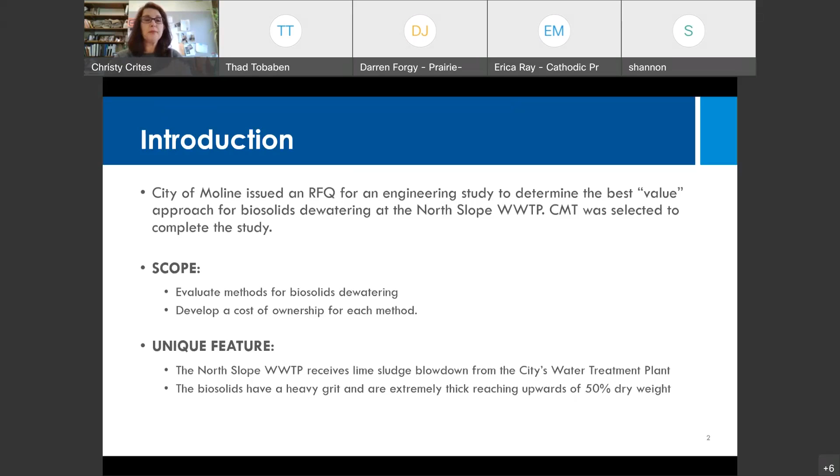The North Slope plant at Moline has a plant capacity of 15 million gallons a day. The original plant was built in 1966 and has had numerous upgrades since then. It's a conventional activated sludge plant. As far as biosolids, what's shown here is a belt filter press and then a belt conveyor that takes the biosolids out.

I forget because I've been doing this for over 25 years, but basically biosolids are the solid product from the wastewater treatment process. Everything that settles out in the primary clarifiers and secondary clarifiers is all taken together, and then it's treated, and ultimately you can either land apply it or handle it wet or dry. Handling it dry gets rid of a lot of the water, so a lot of places prefer to dewater their solids before they either land apply or landfill them.

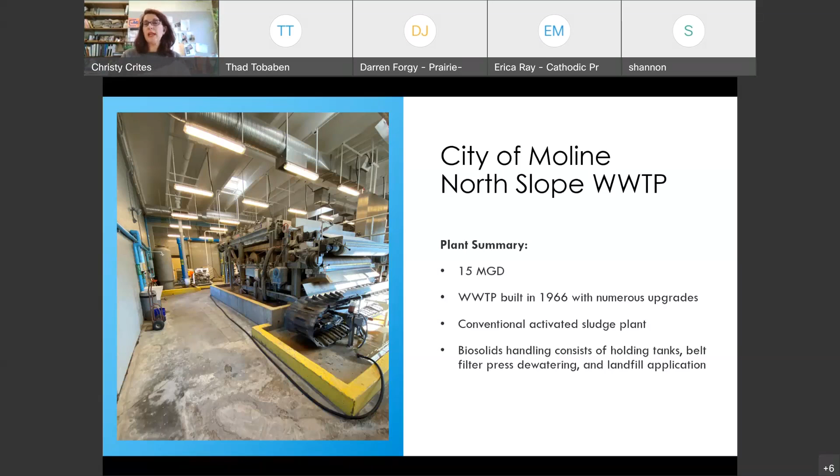So their current operation, this is a picture of a belt filter press, and basically how it operates is it's got a perforated belt. The biosolids, which are probably 8 to 10% solids when they go across it, the water drains down into the sump that you see, and then the dry biosolids come off the top and fall onto the belt conveyor in front of you in this picture, and that goes on out.

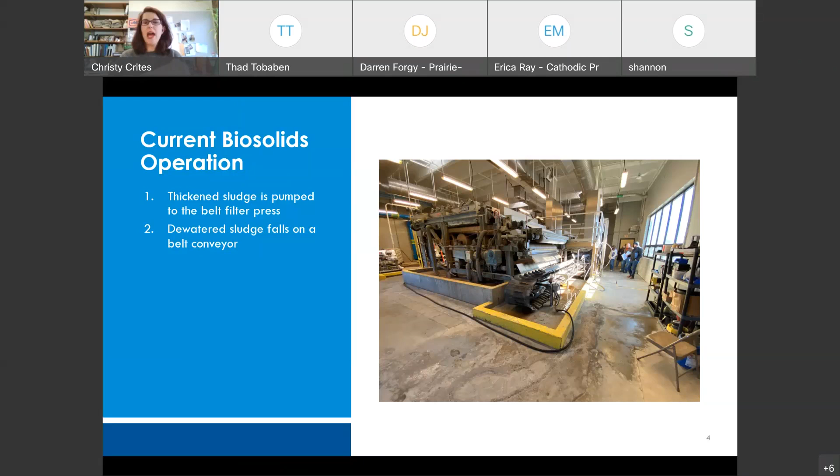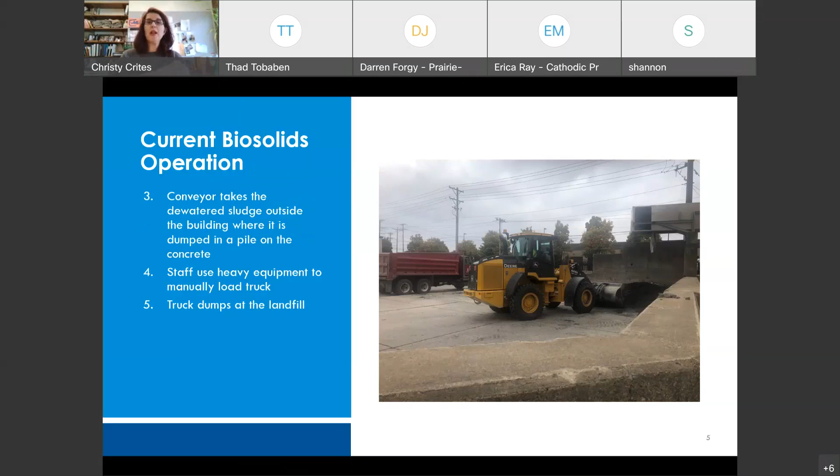Where it ends up is it's dumped outside into a pile, and then the plant staff running heavy equipment actually manually loads the trucks, and these biosolids are taken to the landfill. So it's a fairly labor-intensive process, and we'll get more detail as we go.

The current process, for any of you out there in the wastewater field who have dealt with belt filter presses, you're not going to be surprised at these likes and dislikes. The thing they like about them is they process a very large volume of solids in a short period of time. It does a good job of dewatering the biosolids, getting it down to typically around 22 to 26% solid on a typical municipal sludge, and they only have to run it twice a week.

The dislikes: the filter press requires a lot of attention, somebody has to be there keeping an eye on it to make sure all's going well. The startup and shutdown are time consuming. The conveyor is pretty messy, as the stuff falls off, since it's not enclosed, biosolids can fall onto the floor. Belt wear is an issue because of the lime grit, and having to replace that every so often becomes a costly venture. The dry handling is labor intensive, having to move it independently with the end loader and putting it into the trucks.

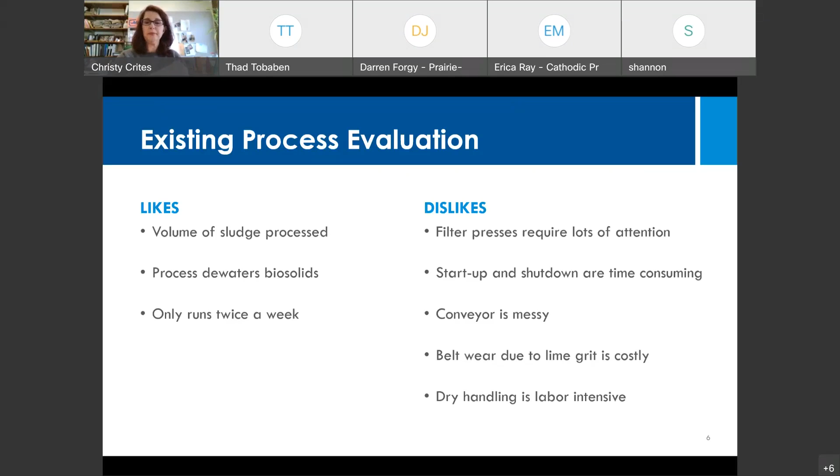So once we got the project, it was time to sit down and do a kickoff meeting. Something that CMT and myself find very important is we like to define the owner's expectations. Just because we know this and do something, we don't know what is their driving force for their decision making, so we sat down and talked.

First, they would like to, if at all possible, reduce the labor to dewater and haul the biosolids. As discussed previously, the belt filter press is very time consuming. So is there a way to automate the process of dewatering the biosolids? Is there a way to eliminate that manual handling of the dry sludge? And is there a way to reduce the labor at the starting and stopping processes? Basically cutting down on the overhead costs of getting the biosolids dewatered.

Next, everybody likes a process that's easy to operate and also can be maintained pretty easily, many times by in-house staff. So can the process run unattended? Is the general maintenance on this piece of equipment minor, or does it have to have a specialty person come in to do the maintenance?

Does the process have redundancy? What happens if you have a unit of equipment that's out of operation or something that fails? And last but not least, annual maintenance - can those kinds of things be handled in-house, or do you have to call in a specialty?

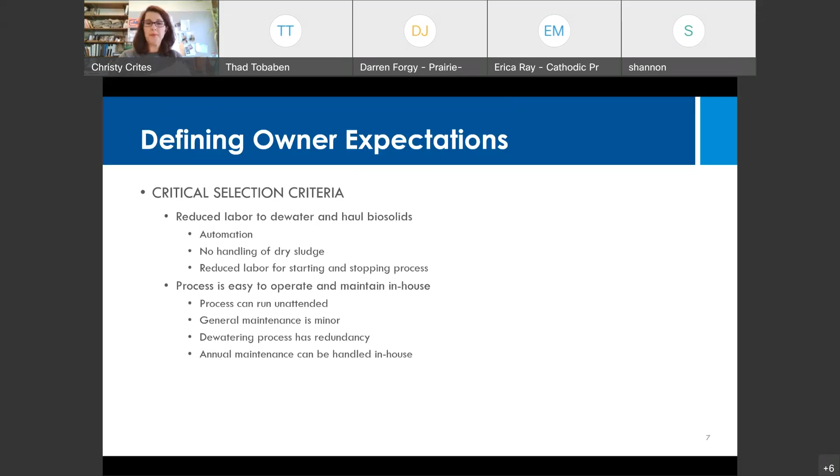More of the critical criteria for the city. Now this one's an interesting one because it's the calendar.

In the past, they had already looked at rebuilding the belt filter presses, but it hadn't moved forward. Then there was a change in the operator at the plant, and the new operator thought, maybe we want to look at something different. Do we really want to go back with the same technology and have the same problems? So it was, can this existing equipment be rehabilitated? And second, by doing the study and then going to a design, is there going to be time to get this process done before the existing equipment actually fails? The belt on the conveyor has been slipping, and when it slips and expands, it can come off the tracks. All of these things are very time consuming and a mess to clean up.

We also wanted to look at chemical costs, because really what you want to get at is the total life cycle cost to run the equipment. That includes polymer addition, the energy it takes to run the process, and the labor it takes for operation and maintenance. And then mine and Maddie's most fun one is constructability.

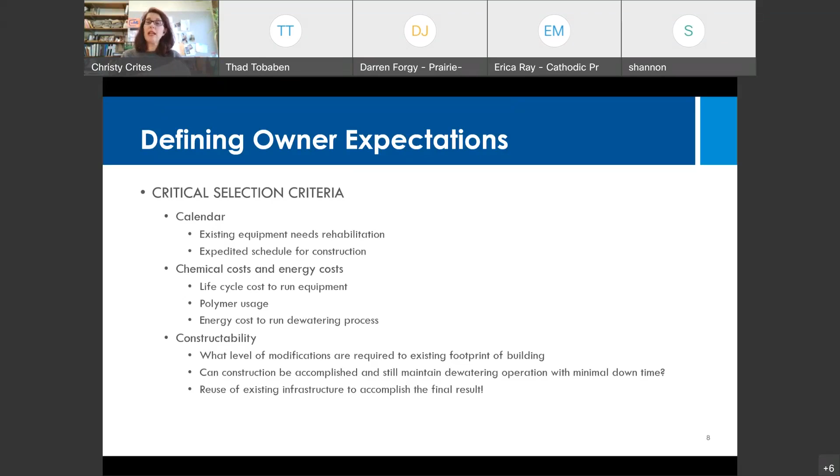What level of modifications are required within the existing footprint? Because they have a dewatering process, can we go back in and either rebuild what we have or put in something different within that same footprint, without having to allow demolition? Can the construction be accomplished and still maintain operation with minimal downtime? And last, how much of that existing infrastructure can we actually reuse to accomplish our final result? Because reusing any infrastructure is obviously going to be a cost savings in the long run.

Options to consider. We sat down and had a long conversation about all the options for sludge dewatering. First option, obviously, is rehabilitate what you already have, which again needs a complete rebuild, not just a belt. Everything needs to be overhauled and replaced.

Look at another technology called a screw press. We'll show you some pictures of that later. And last but not least, a centrifuge. So the difference between a screw press and a centrifuge: a screw press actually has a screw inside of it, and it turns very slowly, and it pushes the water out of the biosolid. The biosolid works its way up the screw, or down the screw, and then it discharges.

And they rotate, maybe like Maddie, how many revolutions per minute, do you remember? I think it's like 0.25. Very, very slow. So then on the centrifuge, on the opposite, it spins very, very fast, and it throws the solids outside and removes the water that way. And it runs at, Maddie can correct me, like 3,000 RPM. So you've kind of got two alternatives that are at opposite ends of the spectrum, but both do a great job of dewatering the biosolids.

Lastly, after we got the project and during the kickoff meeting, someone with the city asked us if we could look at their existing system and, based on this rebuild, if we could recommend any modifications to the existing operations that might be beneficial to them in the long term. So we also took a look at that.

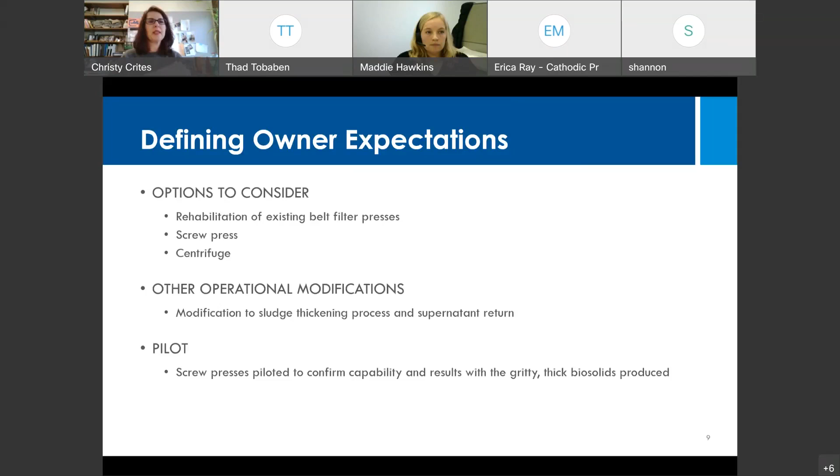Going back, why did they do pilot studies? Well, this is that unique sludge. With that lime from the water treatment plant, it actually improves the settleability of the sludge during the thickening process, and they have been known to actually be pushing 20% cake solids to the presses and coming off around 50. So additional grit was very abrasive in this whole process. You're moving a very thick solid that's got a lot of grit and wear, and can tend to wear parts. So we want to make sure that this is a good fit for this technology.

The screw presses were originally designed for use in the pulp and paper industry and have been gaining popularity in the wastewater side. So a little bit of a new technology, in particular when you have a slightly unique biosolid. They do tend to dewater very easily because of the coagulants that are in it, and end up making that thick biosolid.

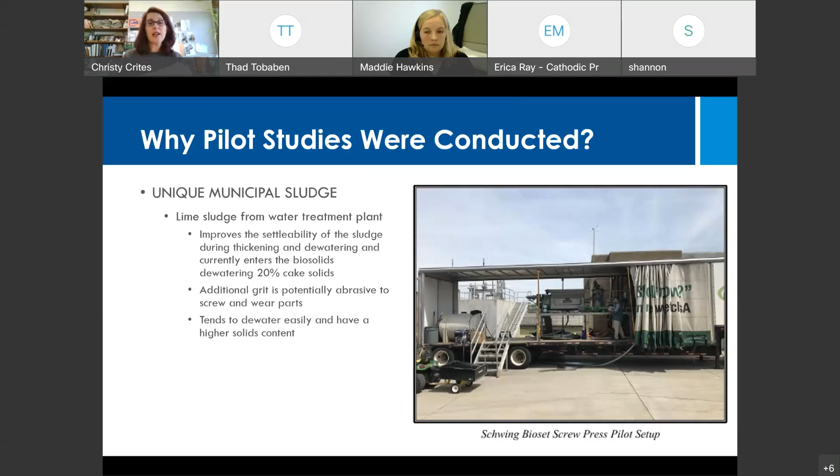Who was piloted? FKC, Huber, and Schwing Bioset. Every system was able to achieve between 49 and 61% cake solids.

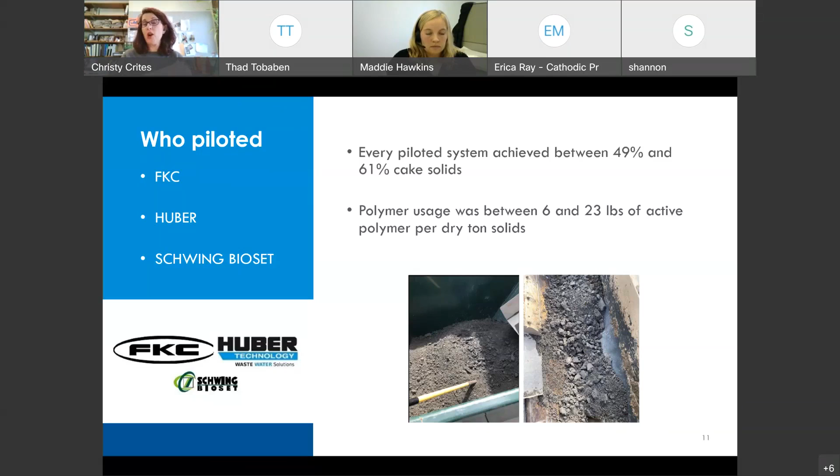Polymer usage was between 6 and 23 pounds of active polymer per dry ton solid, and we used that as part of our evaluation of the overall costs in the study.

So when we got to our alternatives and final costs for replacing the existing belt filter press and conveyor, we looked at a belt press, centrifuge, and screw press, and came up with total present worth costs for each of those options.

As you can see in this table, the annual O&M was a true driver in the overall cost and cost savings of working with each of these. So the City of Moline decided to go with the screw press.

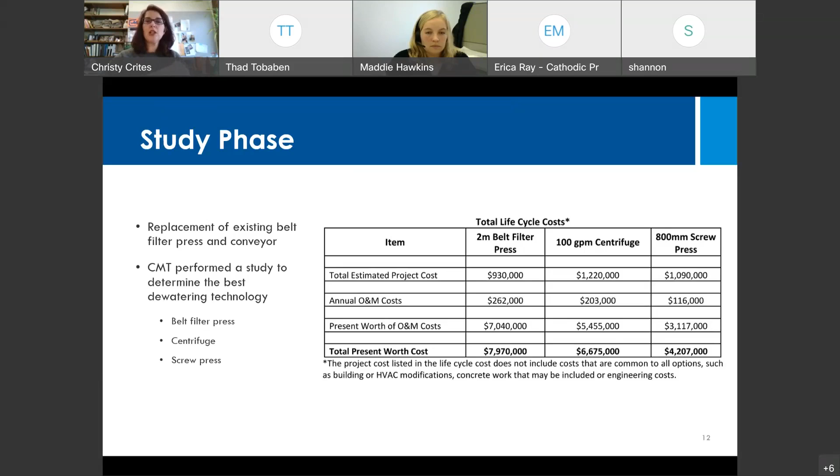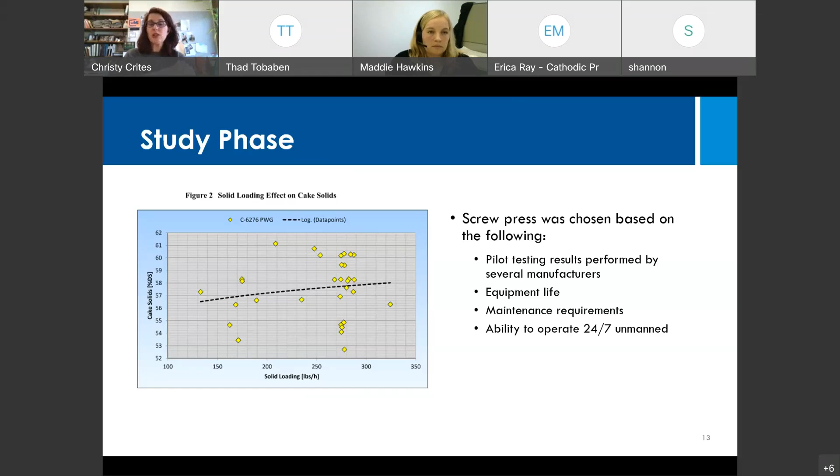So the pilot test results all came in very well. They have a long equipment life, and the maintenance requirements are pretty simple. This particular piece of equipment can actually operate 24/7 through SCADA without being manned.

Then we got to, if we're going to do this, what does the future look like for the way they actually handle and process their biosolids now? As a result of selecting the screw press, which can run unmanned, they could actually look at changing the way they decant or thicken the sludge.

Their current operation is they pump the biosolids to a sludge storage tank, and then they allow that to settle over time, and they pump the water off of the top of the tank as the sludge settles, which we call decant. That decant is then directed back to the head of the plant for retreatment.

In this scenario where they are decanting in large volumes, they pump it down once a day, and then they slug load all of the high nutrients that are in that water to the head of the plant.

If we went to the screw press, it would run slowly 24/7, and that filtrate would come through at a slower pace and equalize over the 24-hour period instead of coming in all at once in a slug load, which would not only help current operation, but will help future operation as the nutrient requirements get more stringent for removal.

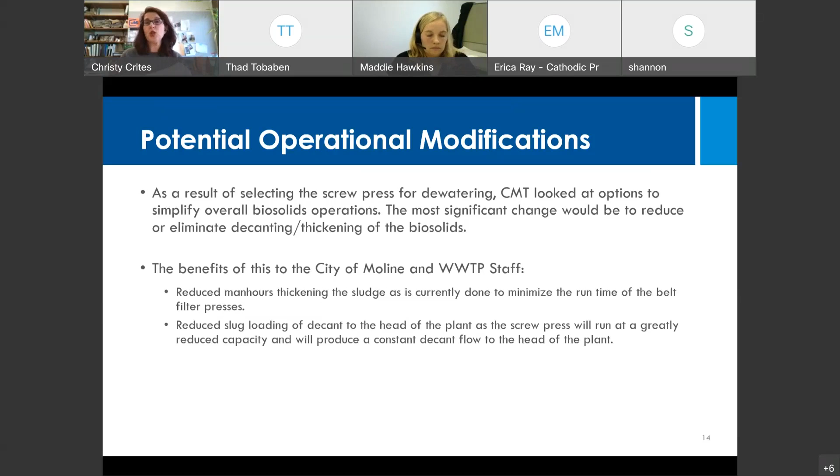Now we get to, what about the schedule? What are our options for moving this project forward? We've done our study, made our selection, and the City of Moline has commented that they're really concerned with how much longer this equipment's going to last. They had the money budgeted to do the project, so there was no need for outside financing.

Well, we looked at a lot of options, and before we go forward, this kind of equipment has in the past taken maybe 5 to 6 months for delivery, and now is taking upwards of 6 to 7 months for delivery. So what are the choices for how to get this project done from start to finish, in the most effective timeline possible?

We look at design bid build. That's the stereotypical way of doing it. Get a lot of quality, maintain your quality in the project. We're always checking back in with the owner, making sure that the design is what they wanted, but it does have the longest schedule. Design build will shorten the schedule, but we're all working together and running towards this schedule, so maybe it works and maybe it doesn't.

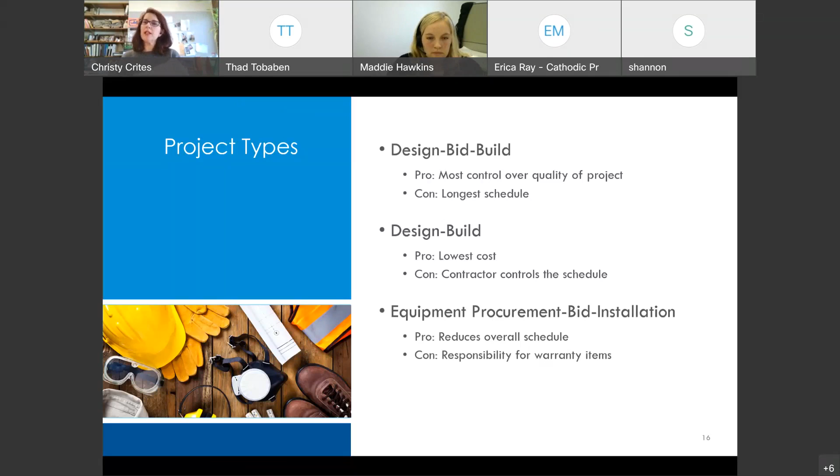Equipment procurement, bid installation - we looked at that because we had done that once before. Basically, the owner procures the equipment, and while the equipment's being manufactured, the engineer's doing the design of the final bid package. Then we put the bid package out, and the contractor's getting selected right before the product is delivered to the site. So the client, the City of Moline, decided that the equipment procurement bid installation project was what they wanted.

So the equipment procurement process, how does that work if you haven't done it before?

Basically, the engineer, us, and Maddie was involved in this, worked directly with the manufacturers to configure a layout within the existing building that's going to meet all the owner's unique needs. We went with 4 manufacturers out of 5: FKC, Huber, Schwing Bioset, BDP, and Ishigaki. Ishigaki decided not to bid it because of the thickness of the sludge. So we were working to make sure we had a system laid out that all of those could bid competitively on. I'm going to turn it over to Maddie to talk about the detailed layout and the costs.

Yeah, so when we discovered we were going to do the procurement process, we thought it would be very important to work closely with the manufacturer because of the unique conditions we have. The client wants complete redundancy in the system, we have an existing building we want to work around, and there's this thick lime sludge. So we wanted open communication with the manufacturer, so we knew exactly what they were going to give us, and we knew the bids that came in were going to fit with our space.

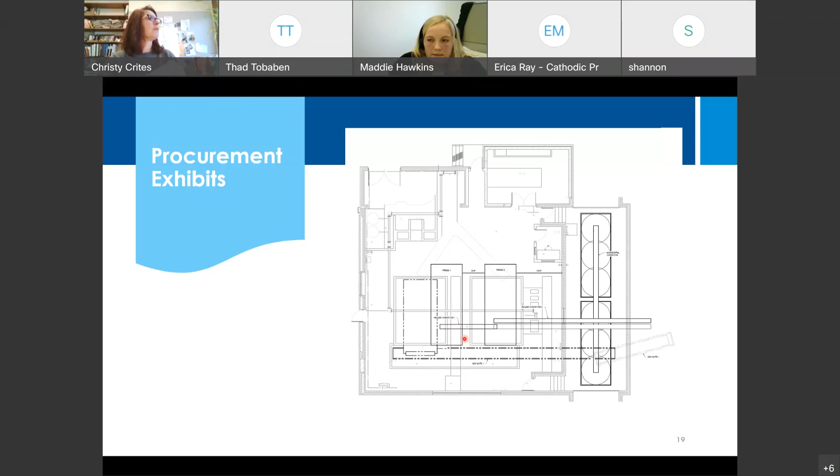And again, this is the exhibit that was included in our procurement documents, and this is the exhibit that all the manufacturers had to make bids on.

So for the specifications, multiple manufacturers were sourced and compared to level the playing field. We quickly realized that the systems of all the manufacturers really widely differed, and we couldn't formulate one spec that would be able to fit them all.

So what we did was we created 4 manufacturer-specific specs so everyone would be included in our procurement documents. At this point, it's important to note that the manufacturers and the engineers have contributed a lot already to the procurement and the project as a whole. We've already gathered a lot of information and done a lot of work to know the layout and the equipment we're going to use. So this is really going to help streamline the design process because now we can focus on things like sequencing during our design phase.

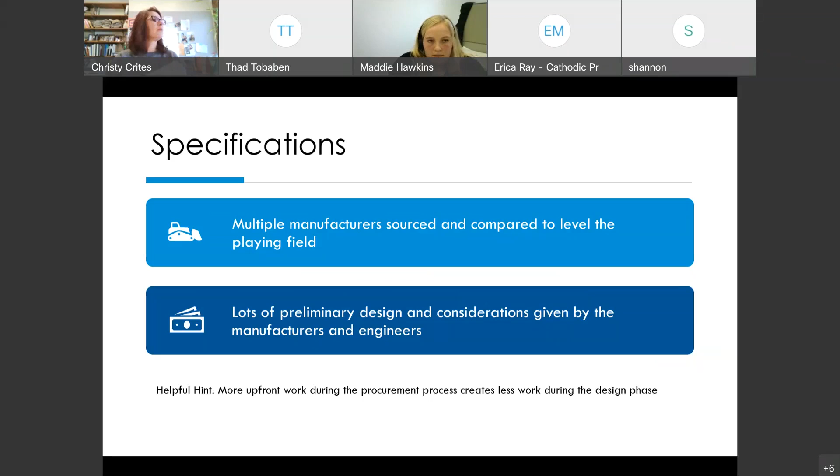So overall, our procurement documents consisted of your standard front-end documents and then those 4 separate manufacturer specs that I mentioned. But at the end, we did have a polymer feed system alternate. Moline does have an existing polymer system that could potentially work with the new screw presses, but they need to be updated. Basically, the pumps are just too big because the screw press requires much less polymer than the existing belt presses do. So those pumps would have to be changed right off the bat.

So what we decided to do was get the alternate just to see how much it would potentially cost to revamp the whole polymer system and see if that was a possibility for the city.

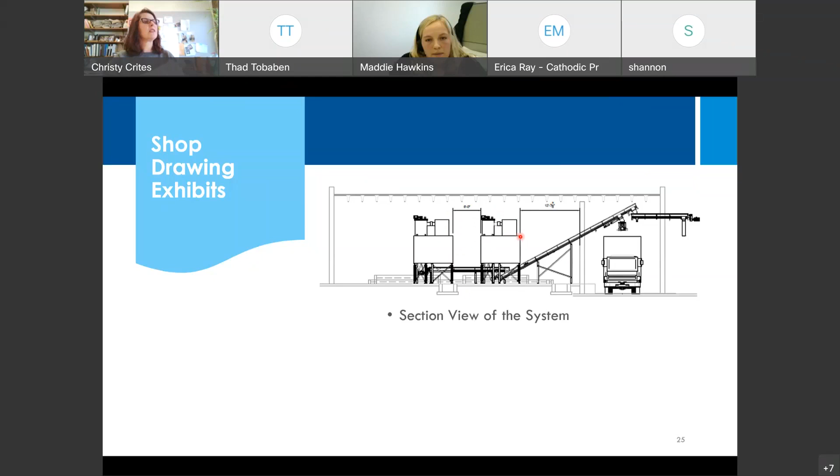It was also discussed that it was really important to have 6 feet between the two screw presses, because there's a motor there that at some point will need maintenance, so we want to make sure there's enough space in between to do that. It's been great just talking with the manufacturer and the client, having that collaboration that comes along with the procurement so we can make these adjustments.

Since we have this layout and know exactly what's going to go into the room, we've really been focusing a lot on sequencing and constructability at this point—how we're going to install the right screw press while the left belt press is still in operation. But really this all starts with how we're going to get the equipment into the building.

We know that we can take apart the existing belt presses in pieces and take them out, which isn't a big deal, but we needed to find out, are these screw presses going to come in one piece? Are the motors going to be separate?

There's a knockout panel on the south wall that we discovered from existing plans, but even with the knockout panel, getting the screw press into the building while the existing belt press is still running and maneuvering it through, it's still going to be pretty tight.

We also have to think about how we're going to demo the belt press while everything's still running. There's a large concrete pad underneath that belt press that has to be demoed, and it's not necessarily going to be a surgical process. So we have to know, do we have enough room to do that? Is it really going to work?

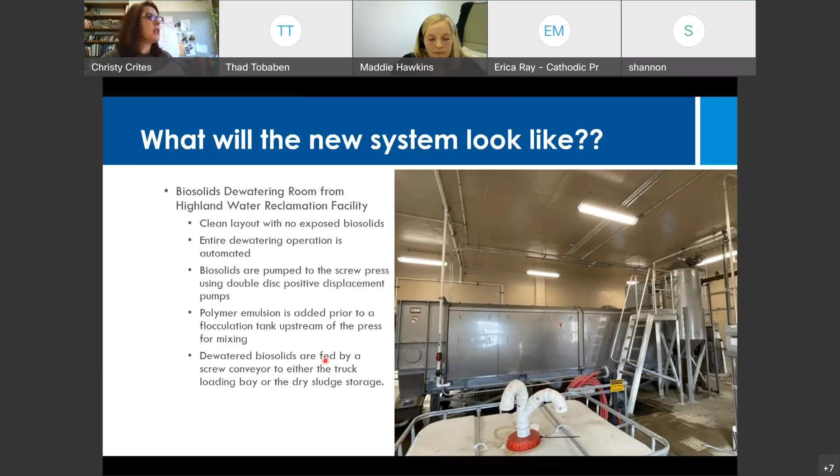Another example of one of these processes is in Highland, Illinois. We have two incline screw presses, the Hubers here, but we did a layout on the conveyance that was exactly the picture the City of Moline had in mind for what they wanted, because they too had a truck loading bay built as part of a prior expansion, but had never been able to quite get that system to work.

So when they toured the Highland plant, they looked at this and said, wow, that's exactly what we want. So at least going into the study, we had a very clear picture of what the client anticipated wanting. So down here is the screw conveyor leaving the presses.

It comes out into the truck bay, inclines, comes up, goes over, drops back down to another conveyor, and then this conveyor has a series of different chutes that the biosolids can drop out of. Each chute has an ultrasonic level sensor, so it can sense when the pile gets to a certain height, the chute knife gate will close and it'll open over here and start filling the truck in a different location.

At Highland, they land apply their biosolids, so this is actually a bioapplication truck. The other option is that it can go out into the dry sludge storage area, and we have an exact duplicate of this system where it can drop into numerous piles, because this system in Highland is also like the Moline ones anticipated. It's completely automated.

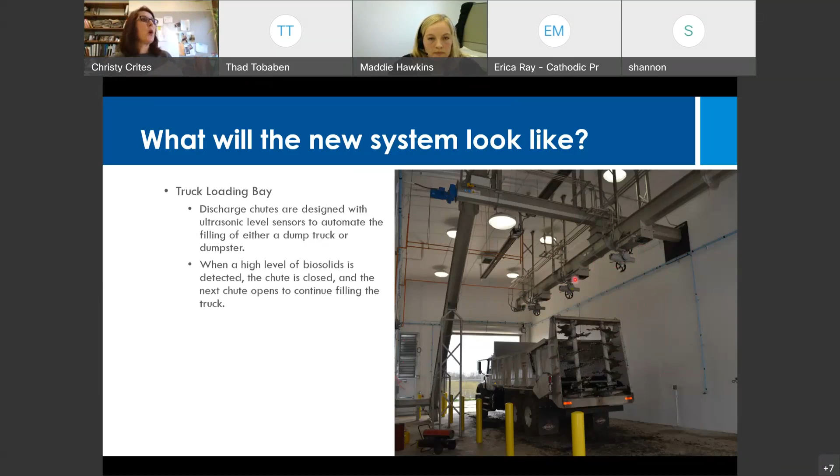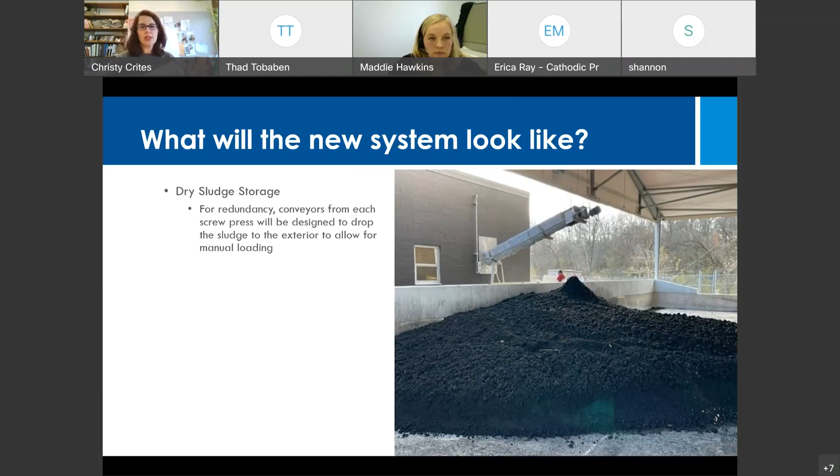So that gives you a picture of what the system will look like. In conclusion, every method of biosolid dewatering has its pros and cons, but determining the key decision factors for the end user is the most important step in the study.

And that's why the City of Moline chose what they chose with the screw press. Always include an evaluation of the total cost of operation of the system, because the centrifuge was more costly since it took more polymer and the maintenance had to be done by an outside entity, versus the screw press that spins so slowly that maintenance is less.

Make sure you address if existing staff can perform that maintenance and include that in your cost savings. Some communities have the ability and the staff to do that, while others have to have everything farmed out.

How important is complete redundancy? In this case, it was a driving factor to have redundancy throughout the process, both for constructability and for end use. Some folks just have one screw press and will store the biosolids if something happens to that press while they're getting it worked on. So understand where those requirements are and the expectations of the end user.

Also, always look at reusing any infrastructure that you can that's available, because that's a way to lower the overall construction cost and continue to get value out of that existing structure. We're making very few changes and using the existing building without a problem. The main issue we have is the demo of those existing containment basins.

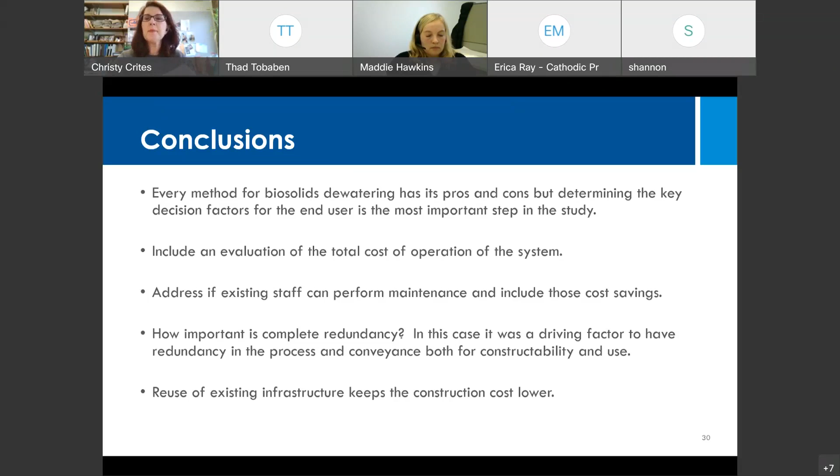Lastly, there are a lot of ways that you can get a project completed. Evaluate the important constraints and determine how those line up with what your owner client goals are. In this case, the procurement bid build was the best choice, but that may not be the same for everyone.

When using this model of the screw press, the owner can get all concerns met since the engineer worked directly with the chosen manufacturer to work out the details. The difference is in the procurement: in a typical design bid build, we're designing around a manufacturer but allowing competitors to come in, so there's always going to be changes to the final design. Whereas in this case, we are literally designing from the shop drawing of the piece of equipment that's going to be there and installed.

So we can get down to every connection, the electrical is exactly as it's going to be, all of the pieces and parts are there. So when we put this out to bid, the contractor sees in that bidding document exactly what they're going to be installing, versus having variability with different manufacturers getting the bid after that time.

Sequence of construction is an engineer's puzzle to put together, which they either love or don't love. We kind of enjoy it because it's a critical factor, especially in these retrofits. Experience in complex construction projects is really an asset, and having done it several times before...

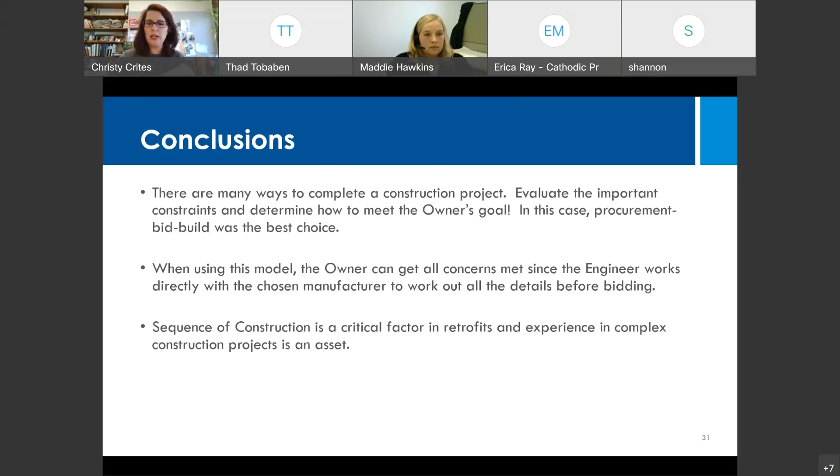So that is putting the squeeze on biosolids.